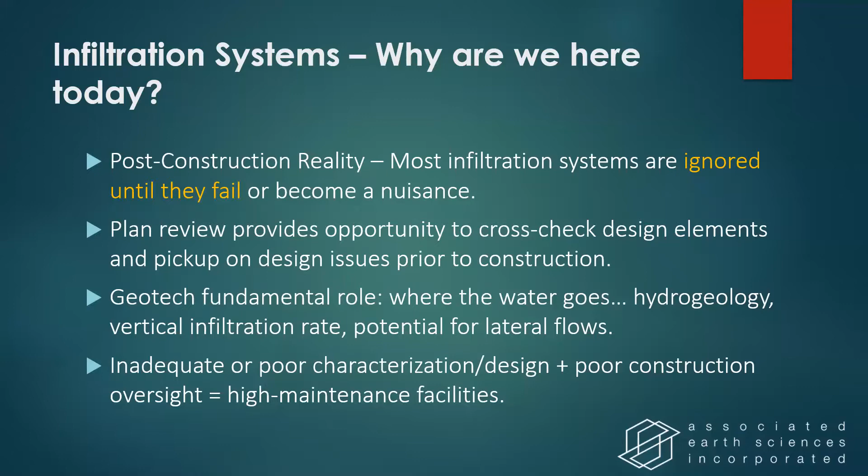So I'll give you the answers right now. The theme here is inadequate subsurface characterization, testing and design, the lack of oversight, and then issues during construction. That's almost all of the reasons we see for facilities failing. If we can pay attention to the upfront design work, pay attention during construction, make sure that the TESC plan is followed and the water quality treatment elements work, your facilities are just going to last a long time. Good conservative design results in good performing facilities.

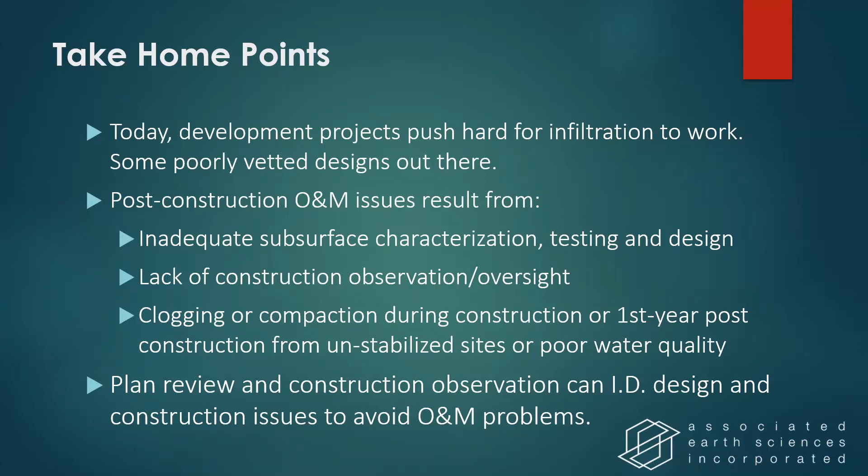I'm going to go through what a geotech report should include, some key plan review elements, and then if there's time, I'll run through a series of examples. I can't see the chat, so when I'm running low on time, please chime in and let me know.

Geotech reports should all include this basic information. What is the receptor soil? What are we putting the water into? It needs to have an interpretation - someone needs to assign a geologic unit to that soil, with discussion of the presence or absence of stratification, the layering. Is the soil consistently sandy gravel, or is it full of silty interbeds? That needs to be described in the geotech report and on the soils logs.

When infiltration testing is conducted, it should represent vertical flow paths for infiltration ponds and bioretention facilities. That's how those depend - the stormwater models all assume that the water put into those ponds is soaking vertically downward. The depth to groundwater needs to be identified, whether there's an aquitard, and which direction groundwater is flowing. These are all fundamental things that should be in the geotech report.

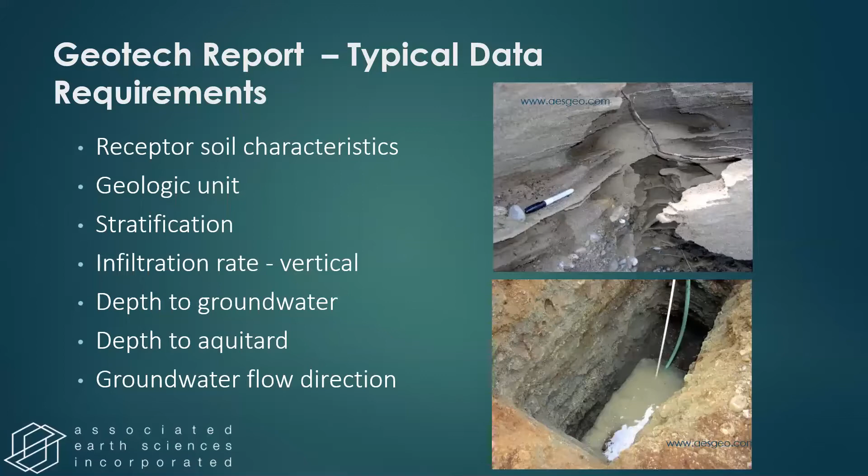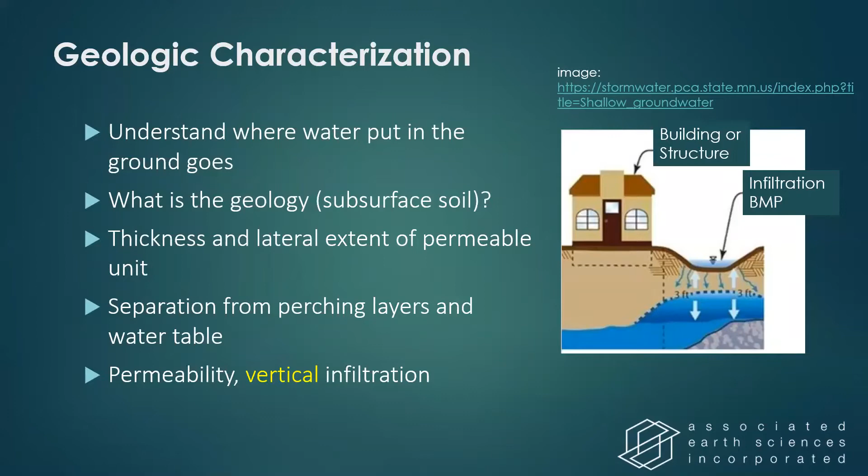The reason why is kind of illustrated with this little cartoon from Minnesota Pollution Control Agency showing a pond next to a foundation. In this image, you see bedrock there, the dark gray unit. For our neck of the woods, glacial till is also usually considered an aquitard, a barrier to vertical flow. So the geotech report should talk about the thickness and lateral extent of the unit we're putting the water into, and there should be separation from perching layers and from the water table.

This is more of a terminology slide. You see a cartoon of outwash, till, and outwash again. In the Puget Sound area, you will see these terms used over and over again in geotech reports: recessional outwash, glacial till, and advance outwash. At depth, beneath those three Vashon age deposits, are either transitional glacial lake deposits or older non-glacial deposits.

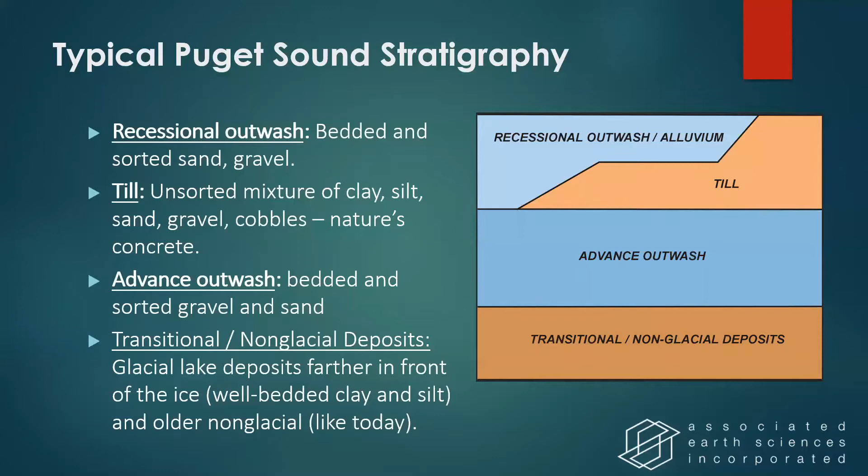Infiltration can work really well when you can dig through the till and put it into the outwash, but infiltration applications have to address the potential for impacts. This one is illustrating landslides. A lot of our landslides along Puget Sound form at this geologic contact between advance outwash and older transitional beds

or Lawton clay or fine-grained units. Glacial till, I'll spend a minute on this because it's important to your surface water model and to an infiltration study. Glacial till was formed at the base of the ice sheet. It's typically referenced in manuals as a source material for building earthen dams because the matrix is a silty fine sand, and when you compact that, it does an excellent job at holding water in.

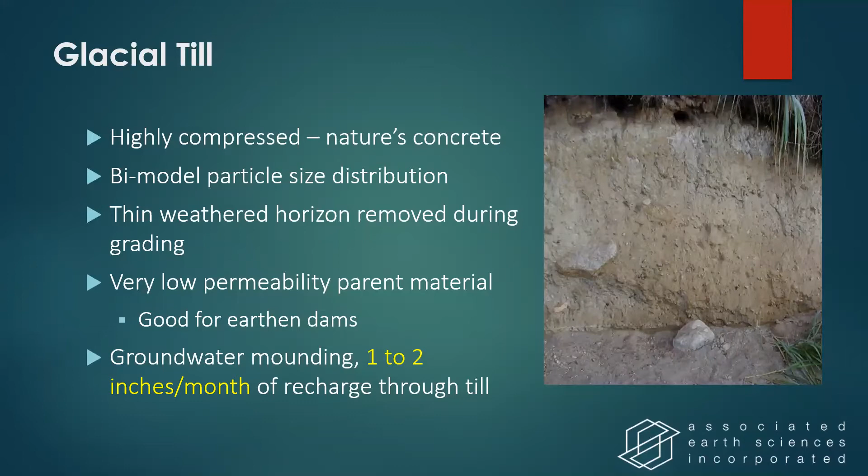So when geotechs approach a site or are asked to explore one, it's usually two different phases. Many times there's a feasibility phase where someone wants to do something with the site and they need to get a sense of the critical areas, the basic soil properties for foundations and for infiltration. There may not be an infiltration location identified yet. Then once that initial feasibility report is done, the civil engineer and the architect put together the proposed land use, and then a second phase of work is often conducted specific to an infiltration facility.

And that infiltration-specific geotech report should cover all of these items. There should be exploration specific to a facility, infiltration testing or soil sampling at the facility base. The groundwater should be identified to the depth to groundwater, and whether or not the seasonal high can be estimated with the information. Which way is the groundwater flowing, particularly for shallow groundwater settings? And once that water soaks into the ground, where is it going? What is the fate of that water?

On the design side, the design infiltration rate needs to reflect the density of subsurface information, the size of the drainage area, the ability of the owner to conduct maintenance, and the ability of the facility to be maintained. We see a large push toward underground infiltration facilities, and the maintenance of those hasn't been well documented in terms of actually fixing a serious decline. It's easier with open ponds where you can see the problem.

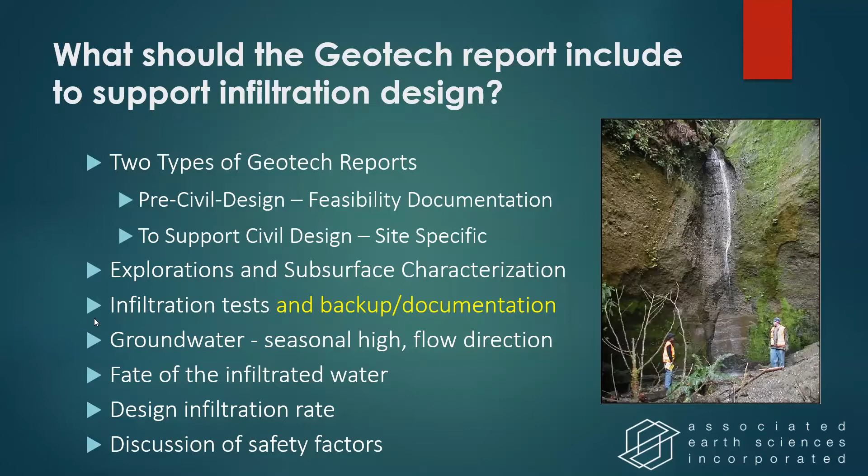For the design infiltration rates, just a little bit of history. Earlier requirements in the 80s and 90s were based on the septic design world, small footprint, small volume tests. They did not represent the subsurface very well, and there were very impressive failures in the 1990s. King County stormwater manuals really changed starting in the mid-90s. The requirements became more robust. The type of testing changed to encourage larger tests that had more water.

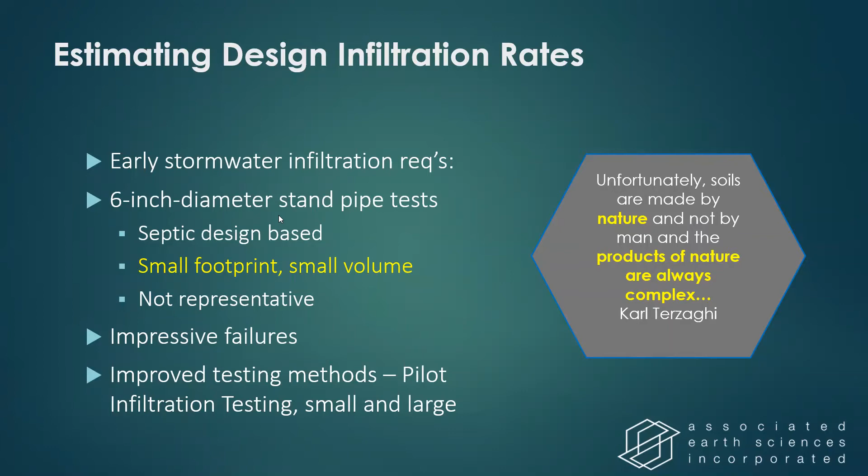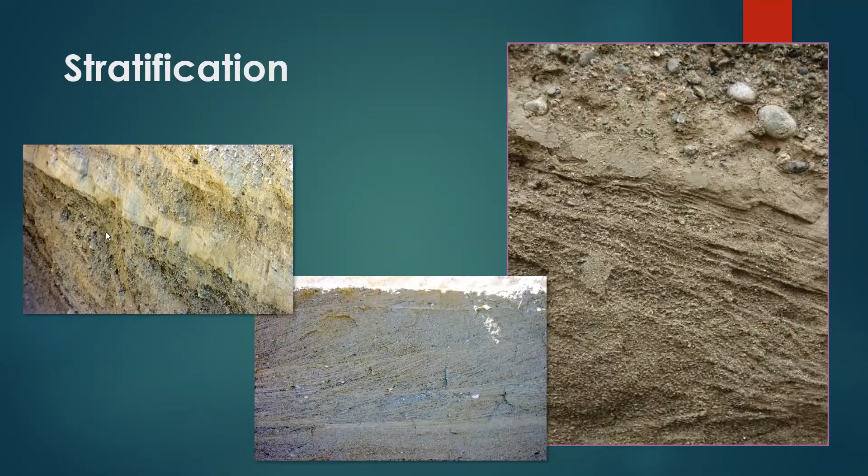A key reason why sometimes infiltration tests do not represent the subsurface is natural subsurface variability and stratification, the layering of soils tied back to how they were deposited. If we're testing above a silty sand, we'll get a lower rate. If we're below the silty sand, we may get a higher infiltration rate. So the natural layering of soils should be discussed relative to the infiltration test results.

One of the key things I look for when reviewing the test is whether they provide background for the infiltration test. Do they report the amount of water used and how long they ran the soaking period? Did they just fill it up and go away, or hold it constant? Did they report the volume?

Another important piece, particularly for large facilities, is whether a mound will build up underneath the facility, a permanent groundwater mound, and does that change the performance infiltration rate? And does it impact adjacent infrastructure like a wall, a slope, or a basement? These things need to be called out in the geotech report.

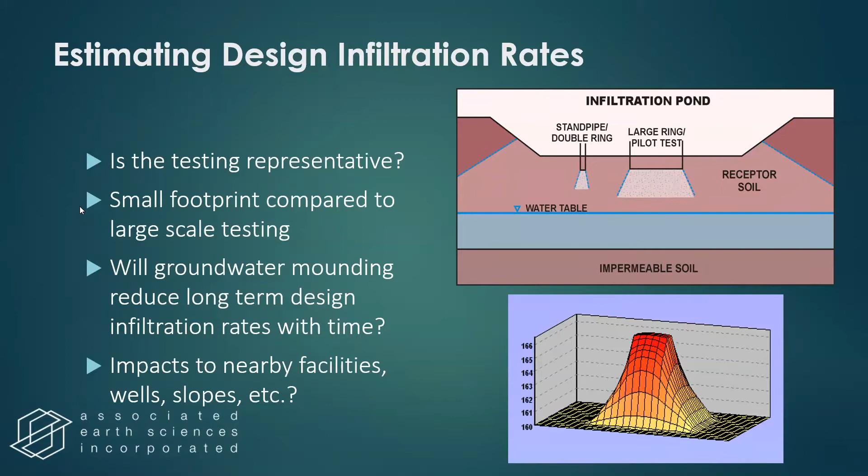A different way to estimate infiltration rate is based on grain size. This is not a water-in-the-ground test. This is taking a sample and running it through a mechanical shaker and measuring the size of material retained. It is not the same as putting water in the ground. Grain size can be a low-cost way to get a gross estimate of infiltration, but the caveat is it takes away any stratification, and for certain grain sizes it can really miss.

What we've noticed by comparing grain size tests to pilot infiltration tests, when we run a pilot infiltration test and then sieve the material the water moved through: when we have very gravelly soils, the grain size based equation can give you a higher number. And when we have silty sediment, the grain size based equation can also give you a higher number. It works relatively well for medium grain sand.

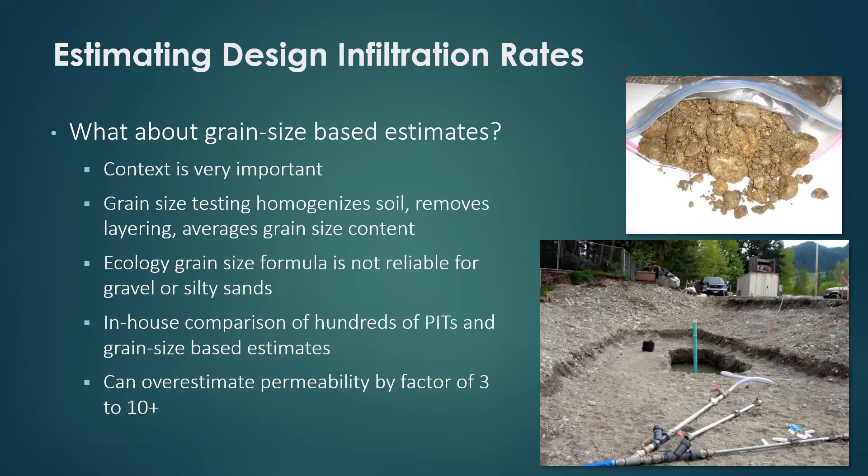As a quick review, the geotech report should go through the basics: the subsurface characterization, how they collected the data, how thick the layer is that we're putting water into, and what was the basis for the infiltration rate and the seasonal high groundwater. Ideally there's a geologic cross-section showing the subsurface layers, where the facility is, and where that infiltrated water will go.

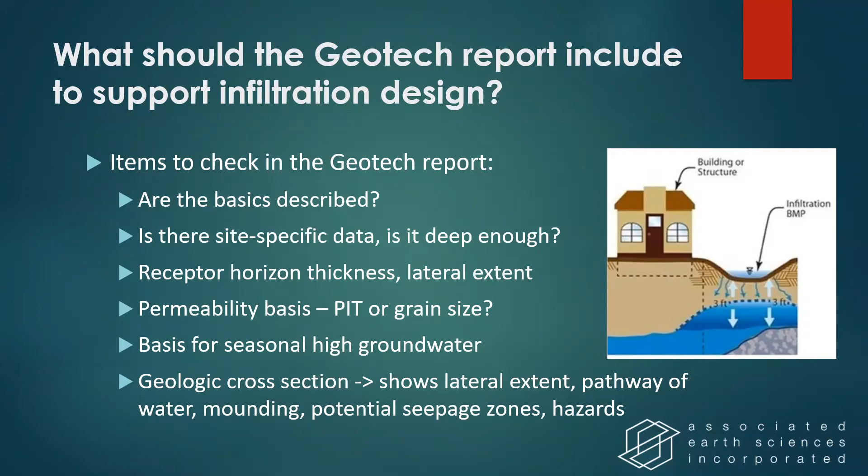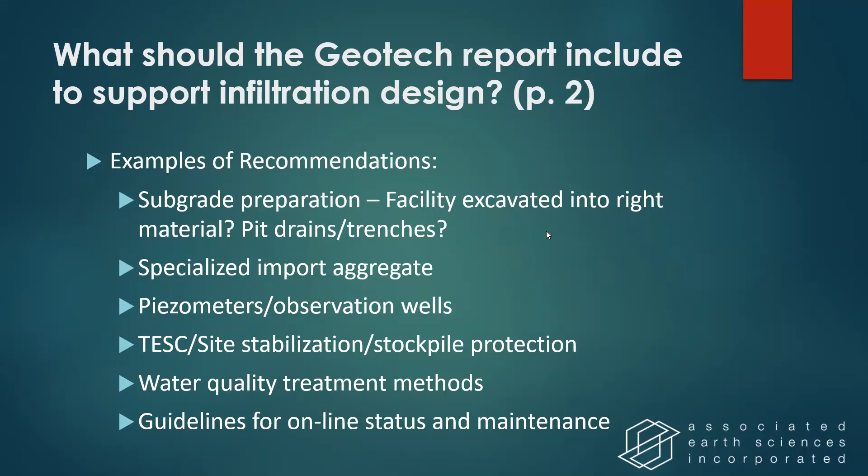Recommendations in the geotech are really important to see if they're carried through onto the civil design plans. This is just a list of some of the recommendations we might make as part of a report.

So plan review. Plan review reduces risk. Many times as a geotech, we're asked to predict the future. We don't have X-ray vision and we don't have crystal balls. We have a few widely spaced explorations that we're correlating between, so the quality of the data is really important. If there was poor recovery, or the driller wasn't able to get to a certain depth because of refusal, that all increases risk.

So plan review from someone working for the owner, the goal is to reduce risk. For someone doing a review for the city, it's to reduce risk to the city.

The first cut I would do is compare the drainage report, the civil stormwater plan, to what's in the geotech report, and look for big disconnects. Is the drainage report calling out soil type C, but the infiltration box is checked? That's a disconnect to me, because soil type C is usually a low permeability unit. So I go to the geotech report and try to see how they came up with an infiltration rate. Another big disconnect is there might be infiltrating permeable pavement, but the site is importing fill. These are just disconnects.

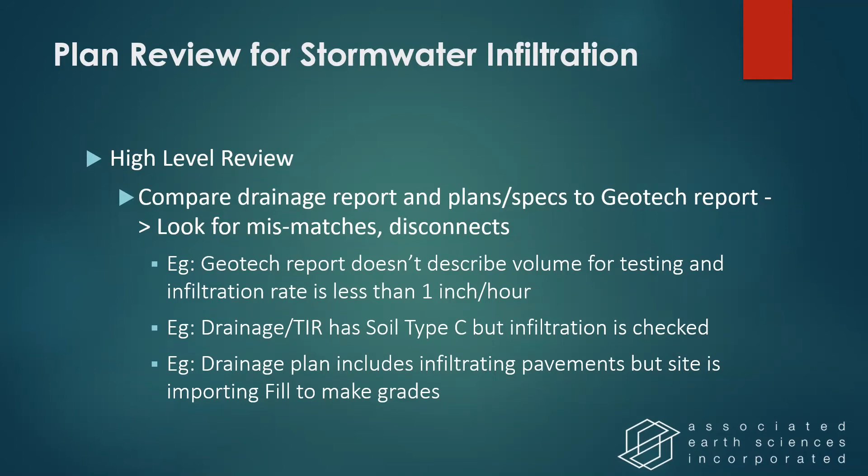On that soil class issue, in the drainage report there's the surface water model that looks at the surface soils. As a geologist, soils to us are just a weathered version of the natural geologic unit. A type A soil is usually an outwash-based soil, like Everett, Indianola, Spanaway. A type C soil is usually a till-based soil, like an Alderwood. So it's good to get familiar with the terminology.

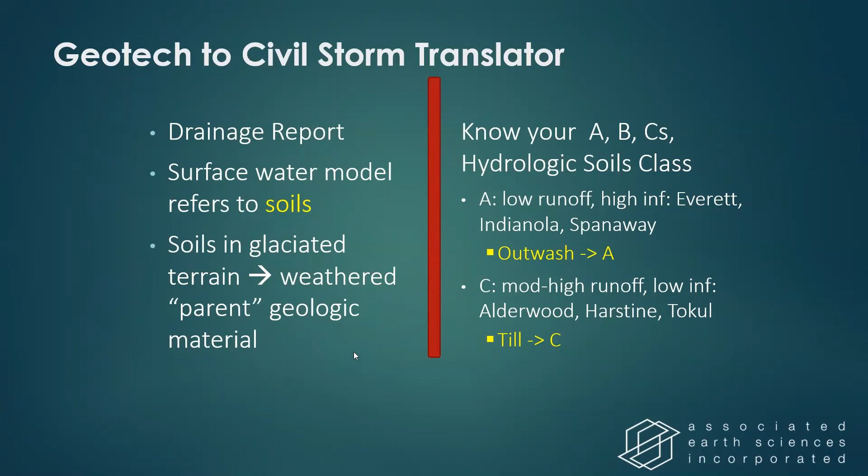The next check I do is look at where the facilities are located relative to the infiltration explorations. Are they in the footprint? Are they at the right elevation or depth? Did the explorations find similar material, or was one different? Does the grading plan remove the tested horizon? Are utility trenches going through the bioretention cell? I've seen that more often than not. And what are they backfilled with? Are there lateral check dams?

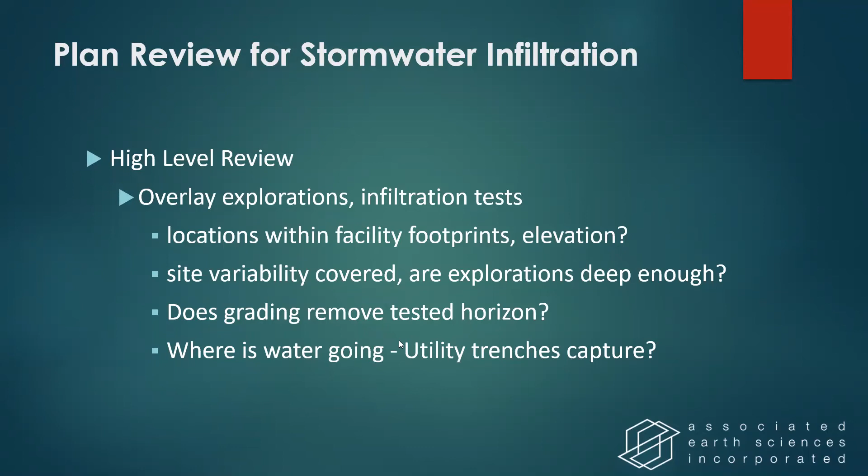Some of the other cross checks are those geotech recommendations. Are they showing up on the plans? So the depth for stripping, scarification, can the machine work in the facility? All of that needs to be called out on the plan.

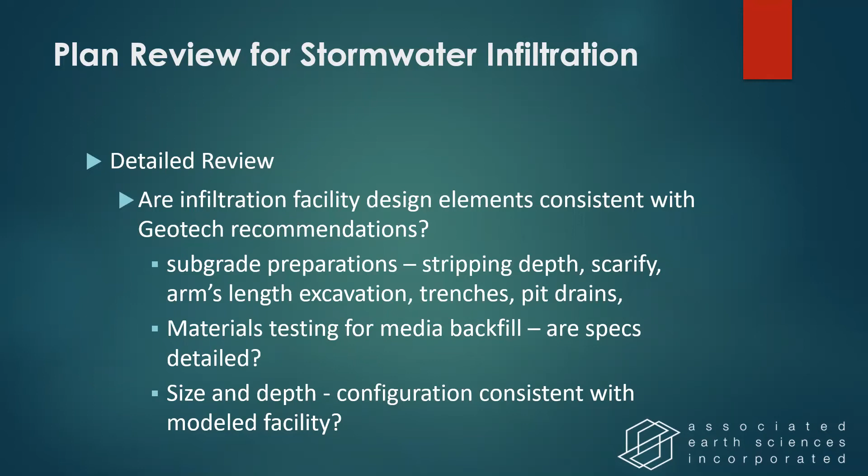Further on, a more detailed review is constructability and sequencing. Are the facilities in an area where access will be challenging? Are cuts required near a building or property line to install a vault?

On the mismatch, some of the older bioretention designs still have fabric called out beneath the bioretention soil on top of drain rock. The fabric is a clogging interface, and we've really tried to work to remove those from the details and instead use a different material for the underdrain.

Is there an overflow path identified? And number one for me is: is geotech field observation required during construction?

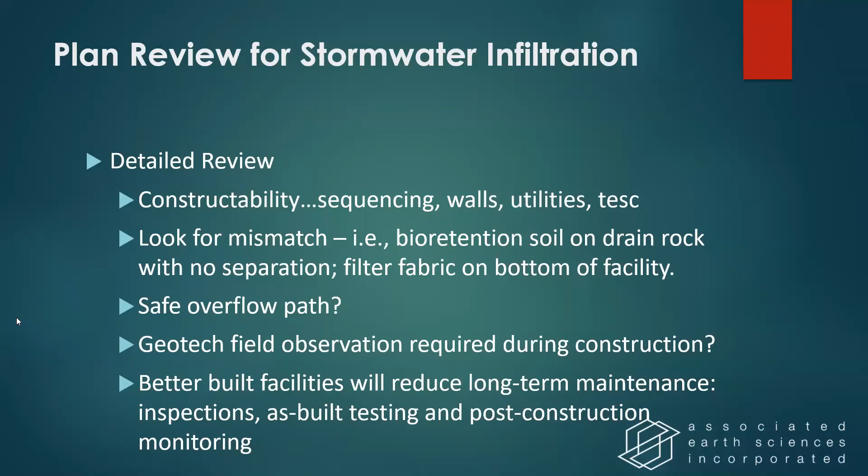So do your plan review. This is just a review of what I've just gone through and highlighted here. Number one: is there ground truthing required?

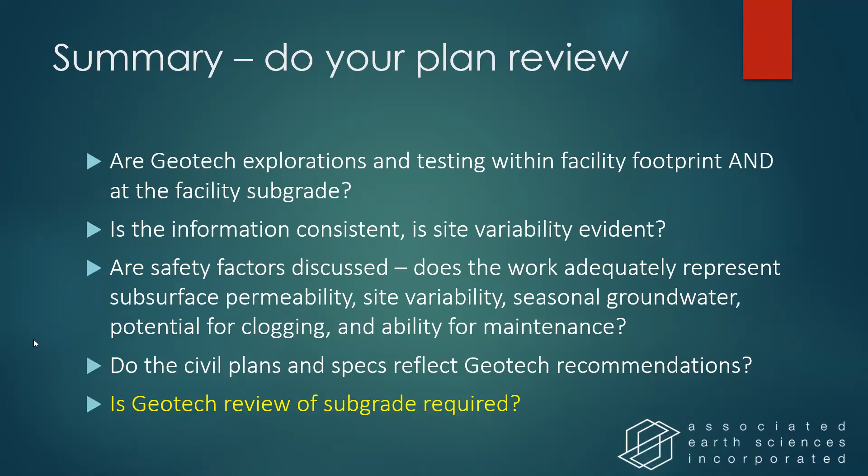I think we've got a little bit of time. We've got about 5 minutes here to do some case studies.

We were part of a team that worked with the Stormwater Action Monitoring Group at Ecology, funded by the Phase 1, Phase 2s, and we were looking at the hydrologic performance of bioretention. As part of that team, I reviewed a lot of geotech and drainage reports. The key disconnect I saw over and over again, especially with the first phase, was the stormwater drainage report not taking into account some of the geotech data.

That improved a lot with the second round, but be familiar with the model inputs. Take that WWHM training if you can, and look for box checking so that the model input for the native soil infiltration rate matches the geotech infiltration test rate.

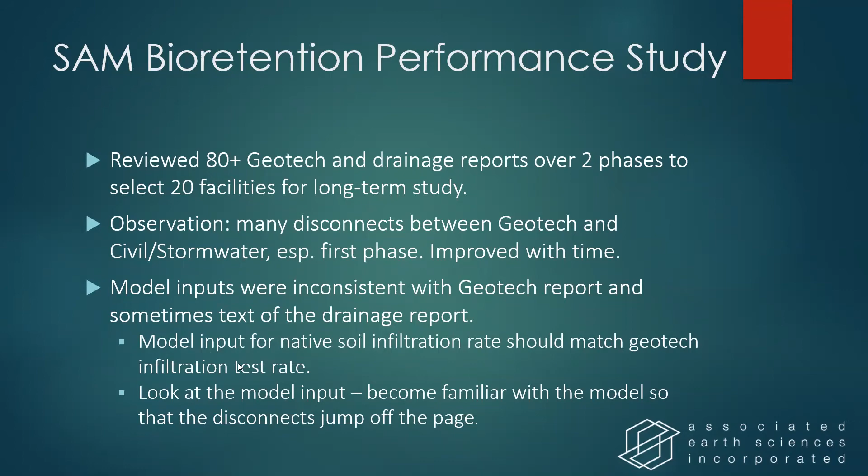Site variability. This was an elementary school. Till upland, underlain by advance outwash. We did several borings for foundations, test pits for a large infiltration vault, and site-specific infiltration testing in the outwash. Then for water quality treatment and flow control, there was a series of bioretention cells.

One of those bioretention cells had the underdrain taken out because for whatever reason they couldn't get the grades to work. The civil just included a note for geotech observation at the time of construction. That's a great note, but there wasn't a backup plan, and we didn't have any explorations in the footprint of that facility. During construction, glacial till was encountered.

We were lucky in that we could do test pits at the time of construction, and we found that the till layer was thin enough that we could dig through it. So the civil did a field fix where they designed an infiltration trench underneath the bioretention soil. This was identified early on as variability across the site, and there should have been another round of exploration to make sure it was okay to remove that underdrain.

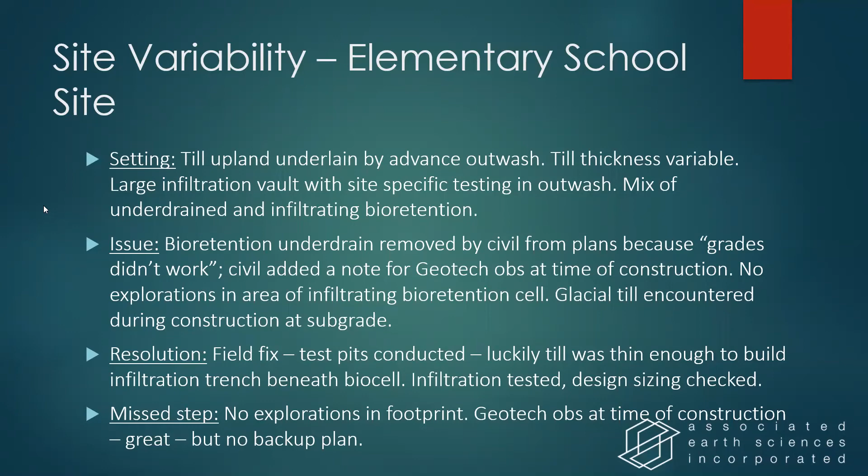Another example of site variability. This was a project where we were called in to fix a poorly performing pond. The work by others had done some test pits and infiltration tests in the pond location, and one of those tests had a 0 infiltration rate.

We don't know if geotech observation occurred at the time of construction, but we watched water levels in the pond for a year, and in the summer, when it finally dried up enough, we went in and looked at the subgrade. Half of the pond was built basically on a silty interbed and had an effective 0 rate. So the solution was to pothole and install a bunch of shallow infiltration trenches to get through that interbed layer.

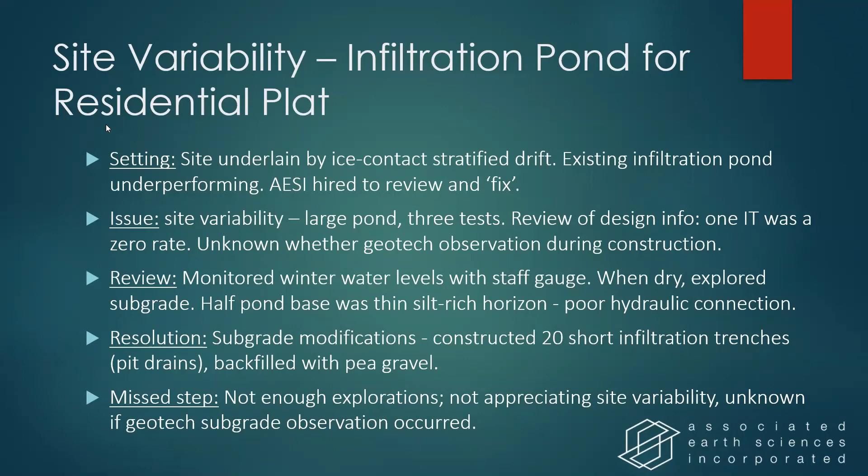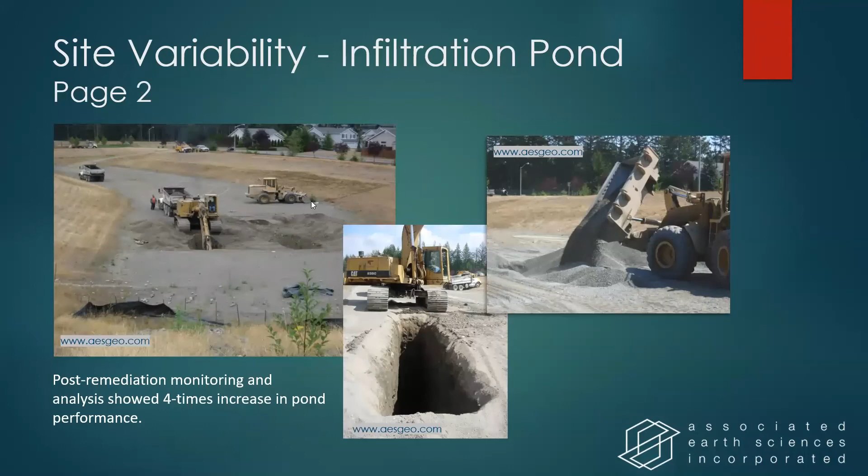On the review side, when you've got one 0 test and two positive tests, that should be a flag to make sure we're out there during construction to look for potential issues. Some photos from that site: a large pond for a residential plat, this was from, I think, the mid-2000s.

For any facility, a very important element is the function of the water quality treatment system. It's particularly important when your infiltration system is a UIC well. They're small diameter, and they work best when the water is as clean as it can be. For this site, the treatment system was a series of filter cartridges and bioswales.

This particular case changed our approach to how we think about those filter vaults. We now require, as part of our plans and specs, that the contractor run water through them before it's brought online. On this site, the bypass weir was set too low, so none of the water was going through the filter cartridges. Strike number 2 is they didn't stabilize the site before they brought the wells online.

Everybody's always pushing on school projects to get them online so the kids can start going, they want to get their occupancy. This one, the landscaping hadn't been fully stabilized, and so the first slug of water bypassed the filter cartridges, and it was chocolate milk, and it clogged the wells.

So we went through an extensive cleaning process. Since that job, we've tested it, had field tests on other vaults, and on one of them, the cartridges were upside down. On another one, the cartridges didn't engage. And so it just raised our nervous level with these.

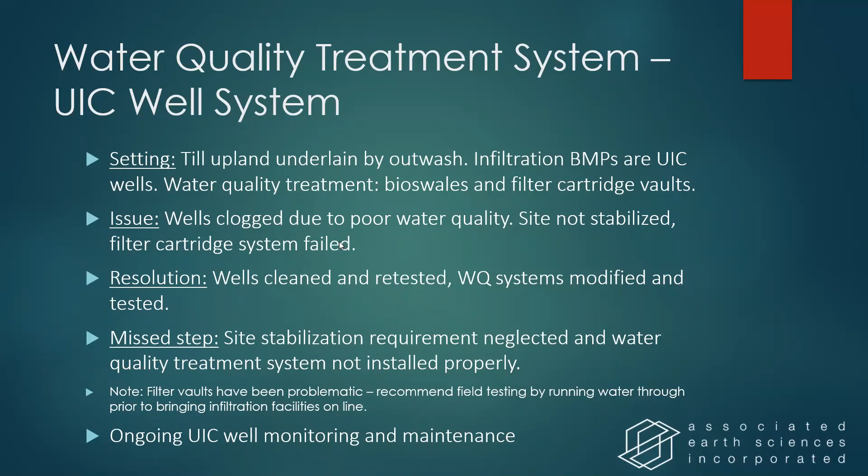For this one, it was a great way to test out cleaning techniques for UIC wells, and the wells were cleaned and retested, monitored for 2 years, and continued to perform well. So the cleaning was successful. It's always disappointing to see that setback due to poor installation on this one.

Let's see, how are we doing on time?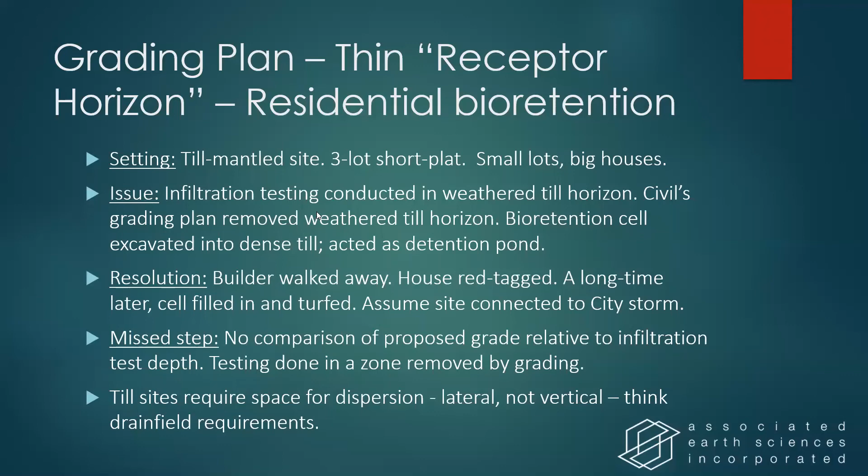Then during construction, the bioretention cells were excavated into till. This is a case history I've shared before, but it's a wonderful example of why till does really good for detention ponds when the weathered horizon is gone. So beautiful bioretention soil, nicely sloped, not planted because someone noticed that there were some issues.

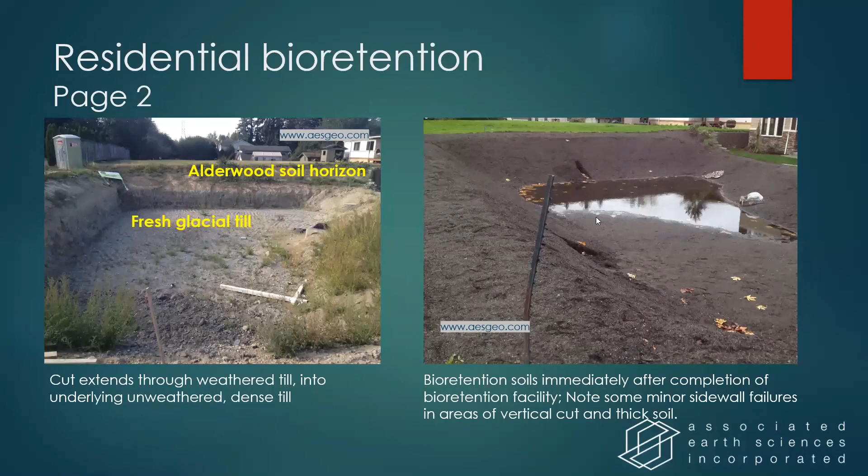And then in the end, it made for a beautiful detention pond, had a little bit of lateral flow toward a neighboring lawn. And it's just one of those disconnects. You know, it's a type C soil. The weathered horizon was removed, and there shouldn't have been an expectation that it would work.

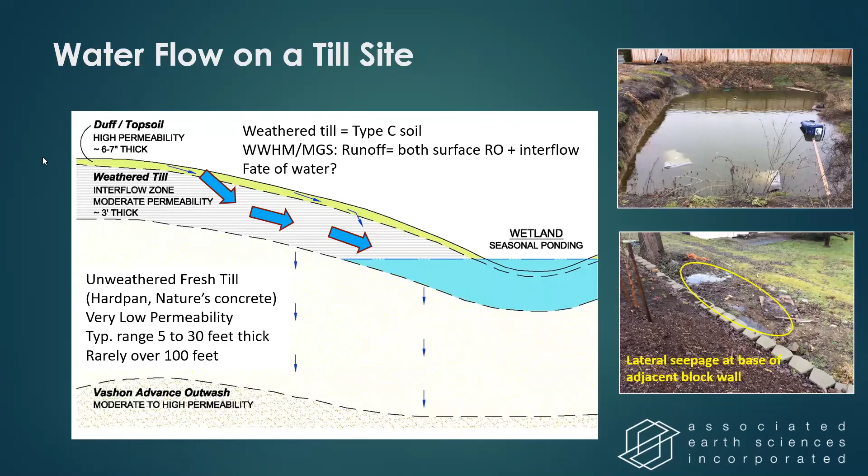Seasonal high groundwater is another one that we see challenging to get right sometimes. This was a project where we monitored groundwater for 2 years, thought we had a good handle on where seasonal high was. There wasn't a lot of space above the water table. We had a vault designed with 3 feet of clearance, ran the groundwater flow model, and everything penciled out.

Then there was a late design change because of a utility crossing. Civil needed to shift the vault. We found out about it later, and the area that they moved it to, groundwater was a foot higher. So then we didn't have our 3 feet of separation anymore. And so when we're reviewing infiltration designs, one of the things I look for is the basis for the seasonal high groundwater.

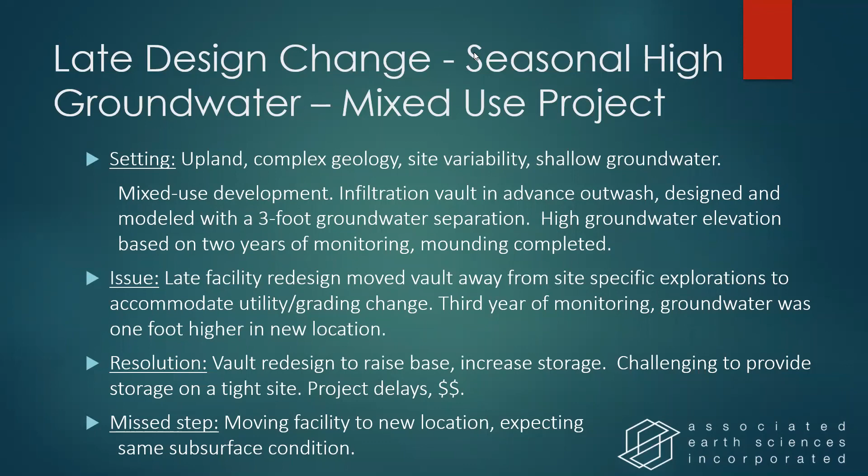I think I'm getting a lot of blinking lights on my chat stuff, so I think I'm probably going to hold off here and go straight to the summary, leave that up.